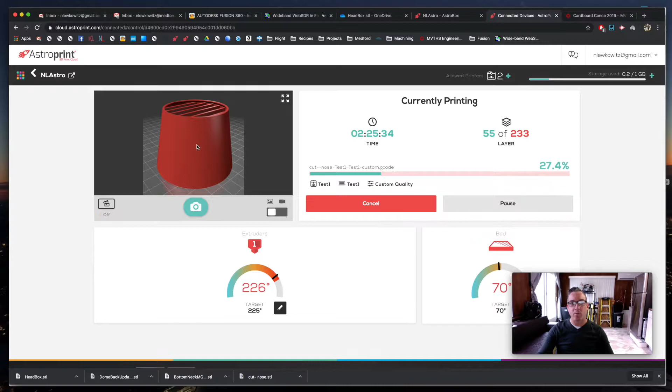I've got the heat of the extruder and the heat of the surface of the bed. I've got my progress, and then I've got my video. And I can also do a lot of other things: setting the printer profile, slicer settings, I have a whole design library full of things that I can 3D print from there, as well as the monitor where I can see what I'm printing and watch the video of it as it's printing.

It's called AstroPrint. It's actually free to use. You can buy a custom Raspberry Pi box from them that's got all of the code on it already, or you can do it yourself, which, if you're an engineering student, is pretty easy, and that's what I did. And I just have it running off of my 3D printer so that I can see what I'm doing. Pretty cool. If anybody is interested, happy to talk to you more about that.

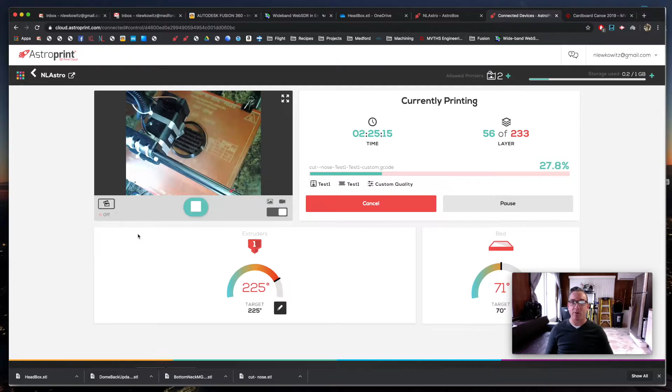Okay, moving on to Fusion. Here we are. So we're going to begin to build our canoe. I'm thinking of the canoe in three sort of profiles. If we cut a canoe in half, there's the width of it, and that changes from the center portion of the canoe to the tip, and it will do the same towards the back. The profile from the middle of the canoe to the tip, if we cut it in half long ways, also changes throughout the canoe.

And then the canoe also curves around its side. So there's three profiles that we need to draw first to get the general shape of the canoe. Hopefully it'll make a little more sense as we begin. So we're only going to create 1/4 of the canoe to begin with, and then we will copy that 3 times to make the entirety of the canoe.

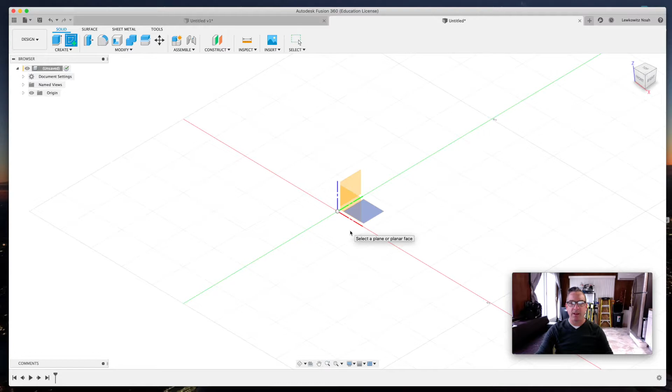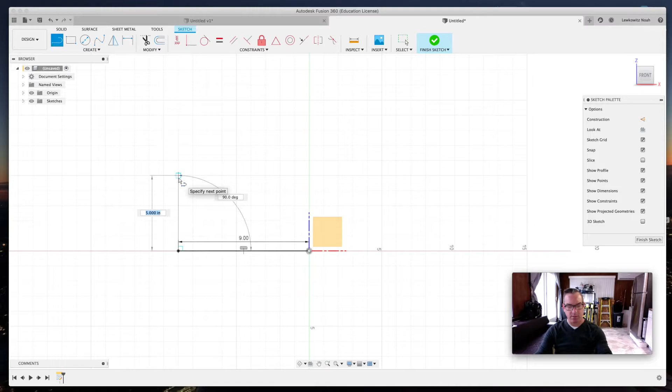Let's get started with a sketch, and let's choose this plane here, and let's draw some construction lines first to start us off. I want to come out about 9 inches, and I'm going to go up, we'll say 12. I'm going to select these, make them construction lines.

I'm going to use the spline tool. You guys have used the spline tool, I believe, before. We're going to start at the origin point here. Then I'm just going to click somewhere in this area.

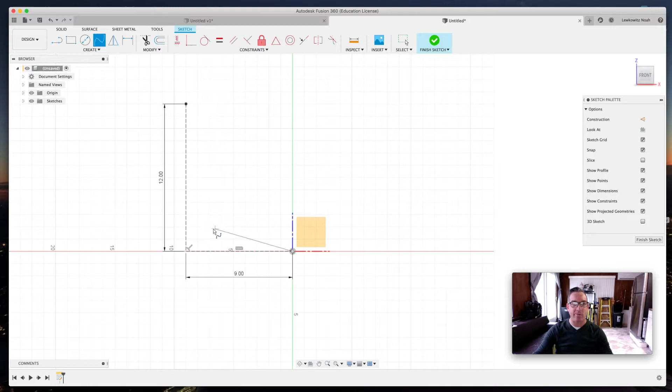Doesn't matter exactly where, we can always move it, but I don't want it to be attached to any of these lines or coincident with any of these lines. I kind of want it to be a little free-flowing. And then I'm going to come and be coincident here with the top. Click there, and then we can just click our check mark.

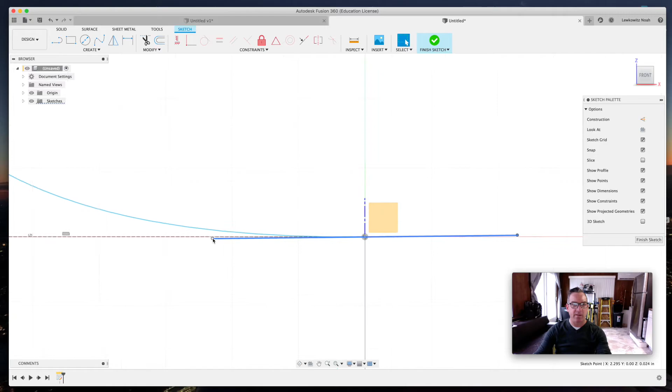So a few things, you can see the green tangent bars here. I want to select this one, and I want to get it as straight as I can. I don't want it to be dipping below this construction line. So there we go. Now I know it's on that construction line. That looks good to me.

And then we're going to kind of do the same thing here. And you can just click on this line again to get your tangent bars back. You can see the X showing that it is on the construction line. And once it's on the construction line, the actual spline cannot be to the left of the construction line. So that's what we want.

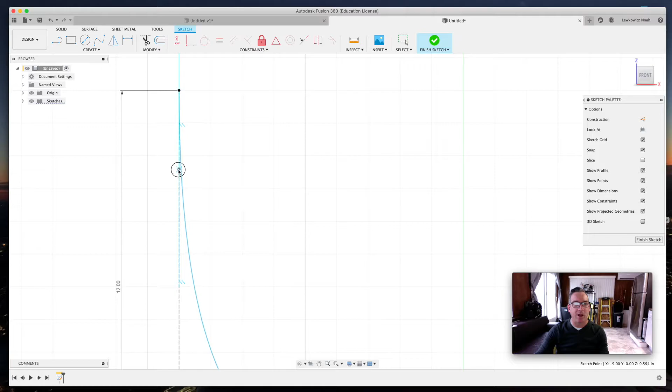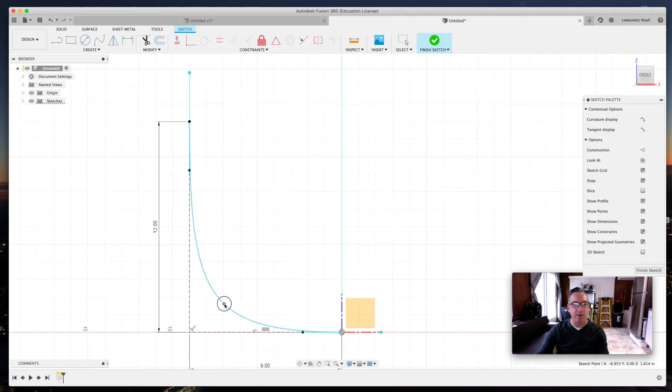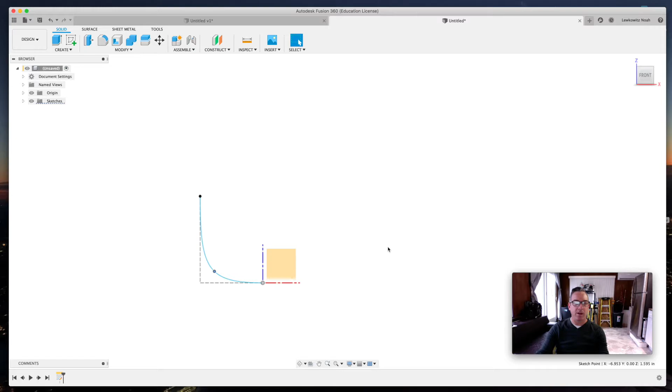And now you can move this around to sort of get the shape you want. Doesn't really matter too much. Make your own design. Get a kind of shape that you're happy with. This looks fine for me, so that's what I'm going to use. Okay. Now we could lock this in place if we wanted to, but I'm just going to leave this as it is for now. So now we've got one of our curved profiles for the shape of the canoe.

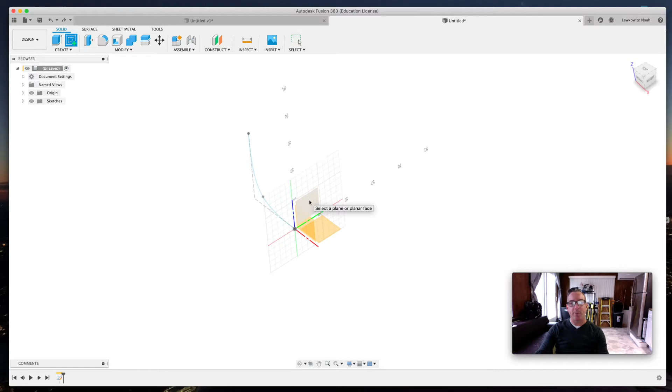All right, so the next one is going to be kind of the long section. This will go from the midpoint of this canoe to the tip of the canoe. We'll begin with another sketch. Here we're going to start with this plane that is perpendicular to the plane we just used. And I'm going to, again, start with some construction lines. We'll make this one 48 inches. And again, if you want to change these dimensions around a little bit, you're totally free to do that. These aren't set in stone or anything. They're just ones I'm playing around with.

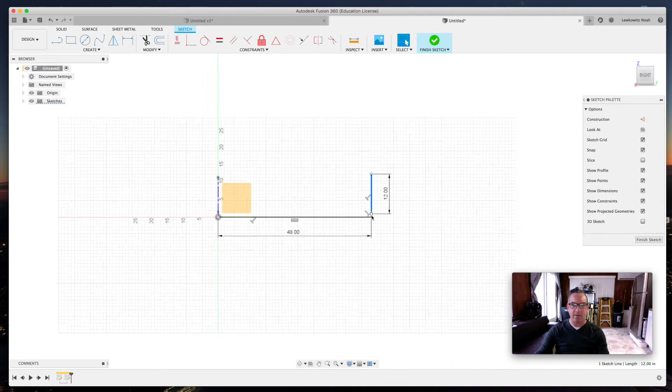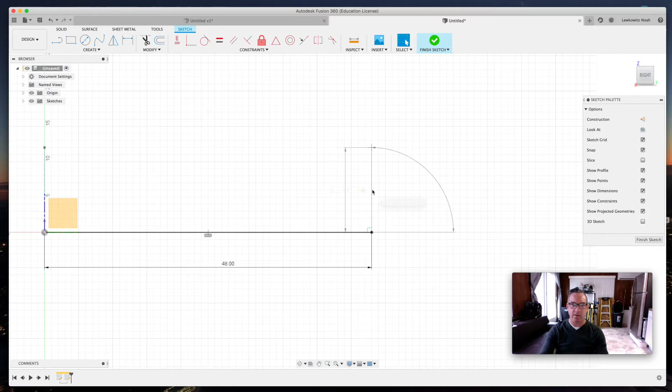Go ahead and select these lines. You'll notice here, this happens to me sometimes, it's added a little tiny line there, and I don't know why it's doing that. Be careful on yours. I'm just going to go back a bit here and get rid of that. Very strange. And we'll come up and try that again. All right, that looks better. And now we'll turn these into construction lines. There we go.

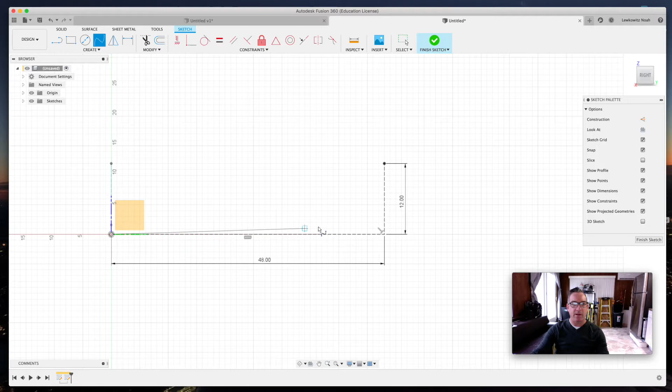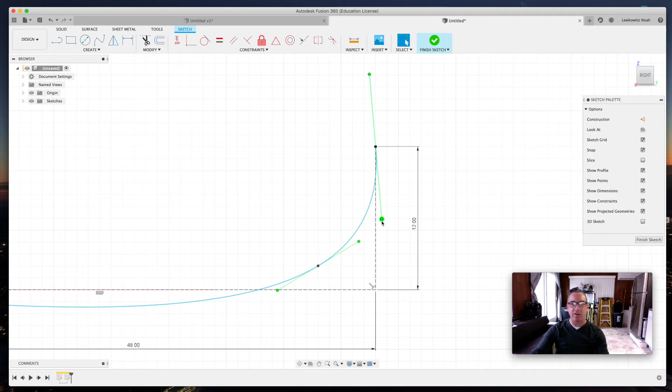And we'll do the same thing. We're going to create a spline. And this is going to kind of be the tip, the nose of the canoe here. So I'm just going to bring a line, the same type of thing, up into a space here. And then we'll come back up and we'll touch that and click there. We're good. I'm going to straighten this line out. Well, maybe we can come down to that midpoint. We need to do the same over here.

And now you can see we're dropping below this construction line. I do not want that, so I'm just going to start to lift this up. And then I can move it down the line to get a little flatter, or I can move up to get a bit more curve and upwards motion with that line. I'm just going to keep coming down, kind of like this. Something like that looks good to me, so we'll keep it here, and we'll finish that sketch.

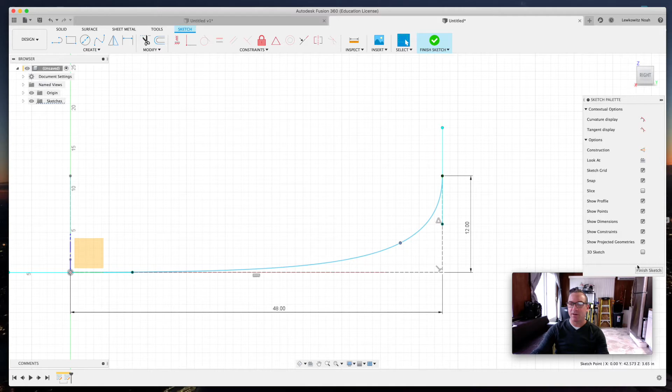Okay, so now you can see we've got these two profile sketches done. There's one more to do. That one is going to connect this point here to this point here. So in order to do that, we need to create an offset plane at the same level as these points. These points we drew up 12 inches, so this construction line is 12 inches, this construction line is 12 inches, so a plane at 12 inches up will be perfect to connect those.

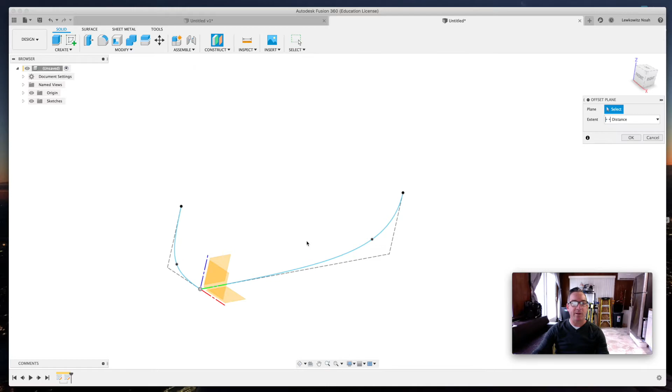So go up to Construct, Offset Plane, choose this bottom plane here, and we can type in 12 and hit Enter. And a new sketch on that plane.

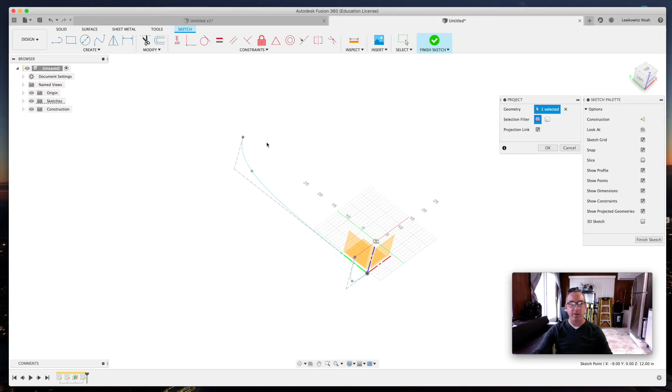I like to just start this one at an angle so I can see the points I want to work with. We'll type in S for the shortcut key here, and I'm just going to do Project. I want to project those points into the plane that I'm working on. So I'm going to click on this one and this one, and just hit OK.

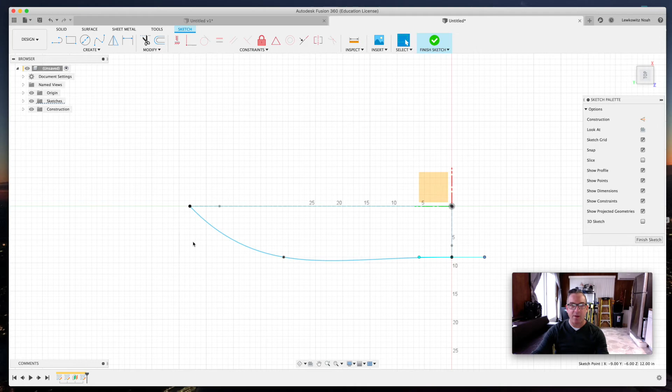Now I'll get my spline tool, we'll select this point and click somewhere over here, and we'll select that point and finish it up. Now I like to work from the top so I can see what this is going to look like. Kind of doing the same thing here. I want to straighten out that one. Let's straighten out this one. I like to make this one a little smaller, so bringing those tangent lines closer together.

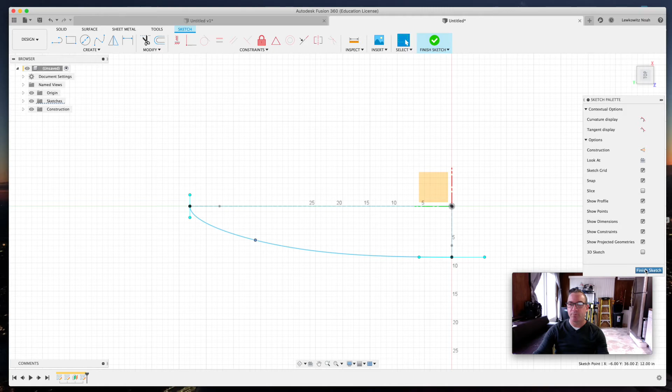And then we'll pull this third point in to get a nice kind of form for the exterior of the canoe. That looks good to me, so that looks good to you. Something similar to that. Give that a shot and we'll finish the sketch out. We've got these 3 profiles, okay? And what we're gonna do is make a surface.

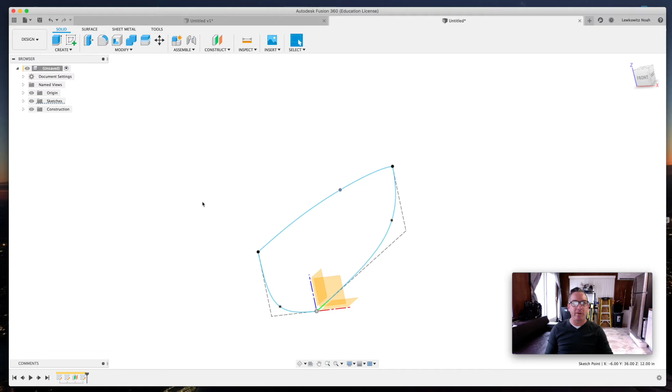A surface is kind of like a 2-dimensional sheathing that's gonna connect these 3 profiles. It really is 2-dimensional, so we couldn't even print it if we wanted to. It's got no depth, but we will give it some depth once we have actually created it, okay? So in order to create surfaces, we actually need to change from the solid menu, which is where we normally work, into the surface menu here.

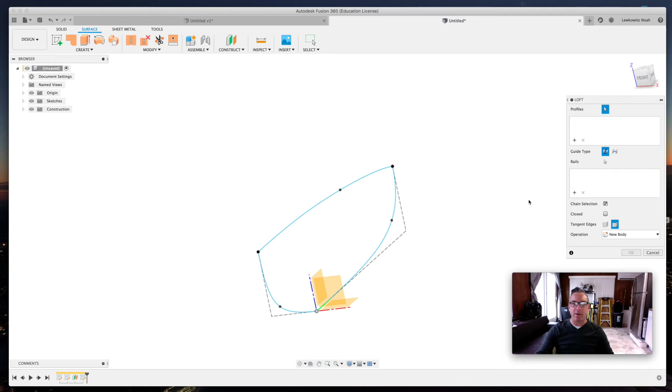So click on surface, you'll see the tools change into sort of an orangey, maybe peach type color, I don't know, doesn't matter, to let us know that we're now in the surface function of the program. I'm gonna go down to create, and this is actually a lofting operation. So I'm gonna click on loft. I'm actually gonna connect this one and this one as my profile 1 and profile 2. This profile is gonna act as what's called a rail. That's gonna keep it bowed out for us.

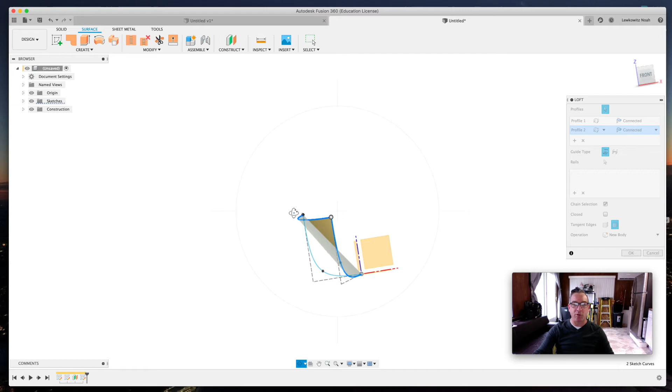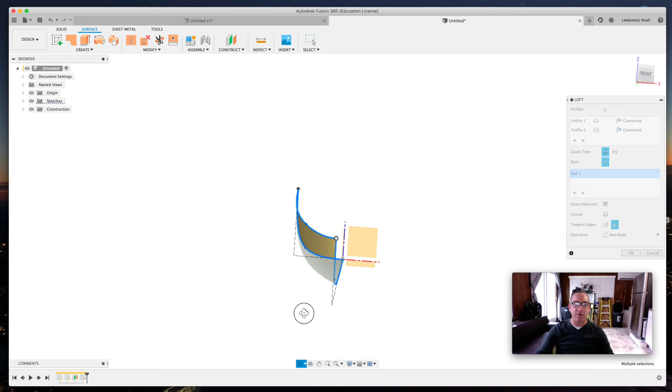So we'll select this profile, hit the plus sign, and this one. And what you'll see here is it's kind of a straight connection. We want it to flow along this sort of profile line here, and that's the rail. So now I will click here and select my rail. And it's conforming now to that rail on this end as it goes around. Pretty cool. So that's this 2D surface that we now have. And we can what's called thicken that to give it depth to turn it into an actual body.

So within the surface tools, we can actually go over to thicken, which is in the create menu. Here it is. And I'll just click on the face that we want to thicken. So I'm going to select 0.25, and that's going to thicken this part 1/4 of an inch, which is kind of the size of a thick cardboard that we might use for making this.

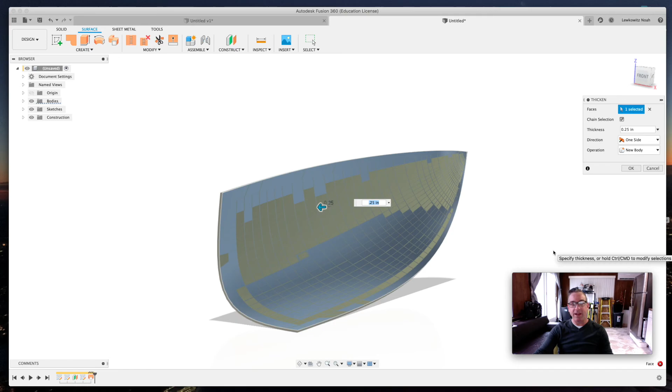Now again, I didn't make the canoe this way for the project because it's really hard to bend the cardboard to fit something like this. But in a perfect world, we might have the ability to do that, so that's why we're making it this way here for the video and to learn how to use these new tools. So I'm going to click OK, and there it is.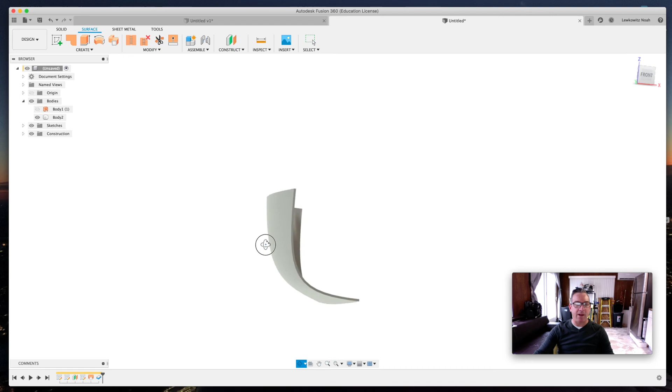Right, so this is an actual body now. You should see a body here. The surface will show up in the body, but it's not a real thing. You can see it turning brown there as I turn it on. And so here is our actual piece. So the next thing we can do is create mirrors of this. So we'll go to the mirror tool, bodies, select this object, and our mirror plane. We'll start here. Click OK. And there we go.

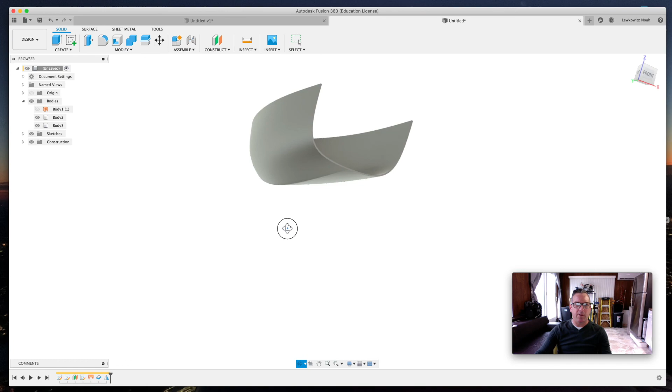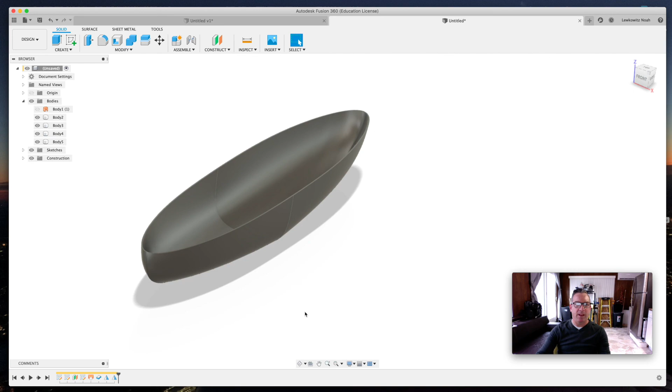Now, we'll actually probably combine these in the end, but just for now, so you can see what it's going to look like. And then we can do another mirror. We can mirror both of these this time, I believe. Bodies, select objects, and the mirror plane will be this one here. There you go. We've got ourselves the beginnings of a really nice looking canoe.

So, give this a shot, see what you can come up with, and I'd love to see the different versions of canoes you can create using the Surface tool.